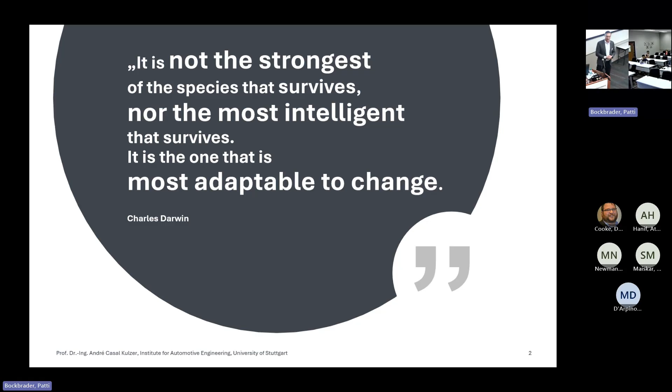There are other needs. We also have climate change, technology change. We have many changes, and we have to learn how to adapt to those. We cannot just stand still against the stream. I saw the river here in Columbus with a very strong stream - we just can't stand still.

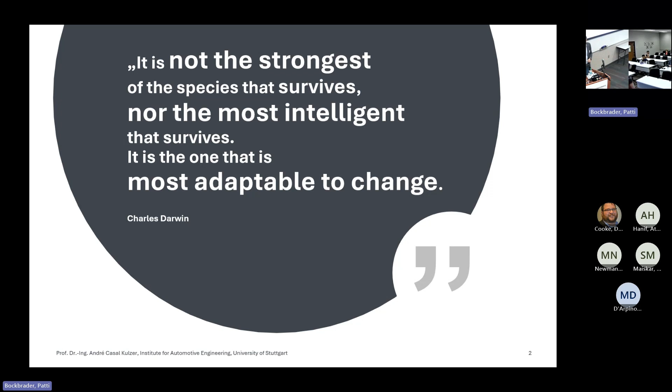So I would like to group my presentation into 3 topics. Start with energy - how is sustainable energy coming, and from where? The second chapter looks at the circular economy, and also at the boundary between a system - it's not only this system or these people, it's the complete world. So you have to look at it in a holistic way.

And then finally go to some recommendations from my side on which technologies we should cover and look for in the future. And right up front, it will not be a silver bullet, of course. It will be some diversity - again, not everything, but we need a certain variation of solutions to look at the problem.

And let me start with the motivation. As engineers, we are efficiency freaks. We should be the first ones to look at the future, and from the United Nations reports, we want to meet our needs without compromising the needs of our children and grandchildren. That's one - the quote from Darwin I already entered to start the presentation. And coming also from some business family tradition, we have also, as a management role, to maintain the ability to act and react.

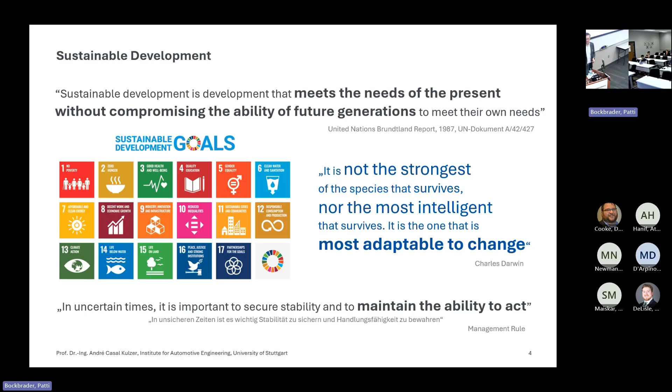If we put all our money in the casino on one number, that might go wrong. Everyone knows that, so it's always good to have a plan B and plan C. So this as a motivation starts here.

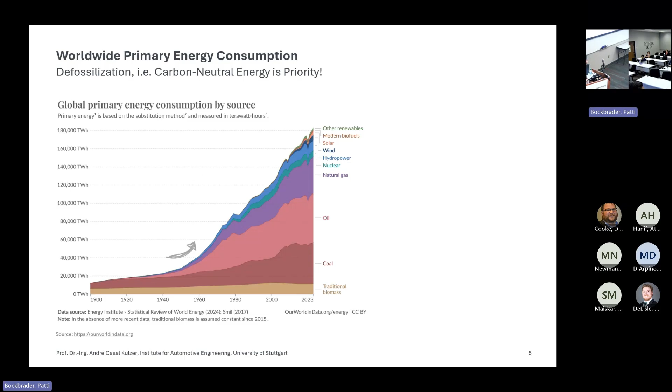One step is, of course, to go into new, more efficient technology, but that takes time. If we look at vehicles, in Europe, in Germany, they take like 10 to 12 years to be switched over. In Greece, I guess, up to 18 years. And we know many vehicles live over 30 and 40 years.

Having been at Porsche for 10 years, one of the slogans there was that 70% of all Porsches ever produced are still on the road. Porsche has existed since the 50s building cars, so there are many vehicles that are still on the road.

Maybe to go a step further, not only looking at new technology as an exchange of products, you have to look also at a complete circular economy regarding energy, raw materials, and CO2, and also where the energy comes from — not only the product being made, but the renewable energy, electricity or molecular nature, to make the propulsion of these vehicles and the propulsion solutions.

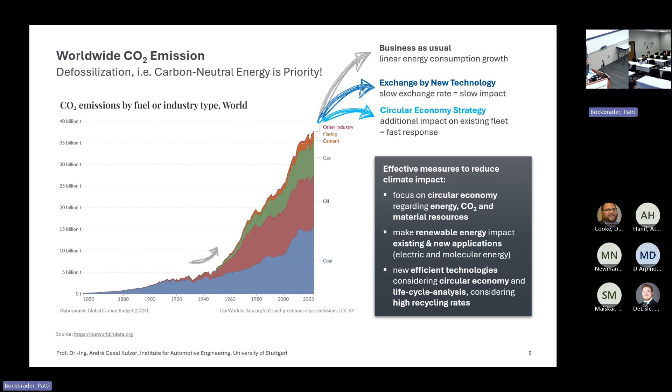So to provoke again a little bit, I saw this kind of sketch last year at the SAE Congress, and I found it quite interesting, so I adapted it to my point of view.

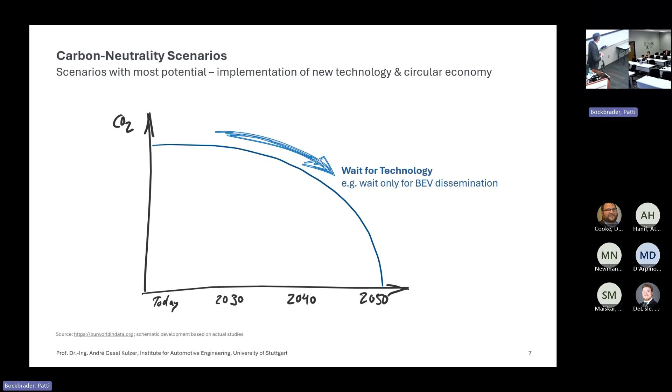If we want to just go with an exchange of new technology — let's say battery electric dissemination, which is a very efficient technology — sure, it has a wide way of improvements and good solutions for the future, especially the battery topic. The electric machine is quite well understood for automotive purposes, but the battery is still a huge topic. If we wait to exchange old vehicles for new ones, that would take more time.

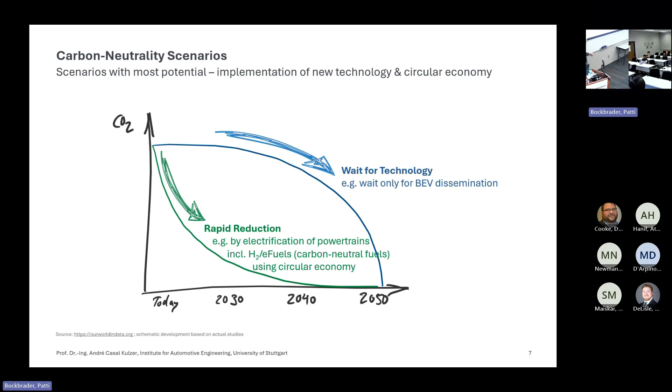If we try to be faster, one way would be to additionally integrate all circular economy topics into the energy side — not only electricity, but also molecular low-carbon fuels, carbon-neutral fuels like hydrogen or e-fuels. This could be an interesting way if we don't want to look only at silver bullets, which battery electric vehicles certainly are a very good solution, but let's also look at other technologies at the same time.

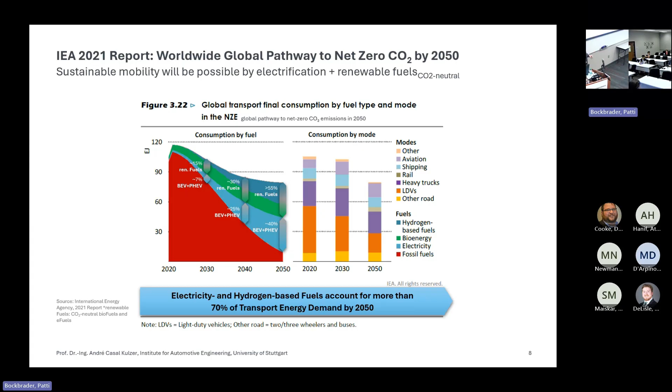Of course, for light-duty vehicles it's easier to electrify. Energy-intensive applications like marine navigation are not so easy to electrify, so you have to adapt your renewable energy carrier to your application. This also shows that diversity is needed in the future — electrification is of course one of the parts to go.

There was an update a couple of years later from the IEA. If one tries to look at it — I'll just use the pointer — they tried to separate light-duty vehicles from heavy trucks. You see that by 2030, which is less than 5 years away, that's almost no time at all. For robust development you always need decades or more for dissemination of innovation into the market, so 10 years is nothing.

But you see that even by 2030, most of it will still be oil-driven, with part biofuels, hydrogen, or electricity. By 2050 — 25 years from today — well, let's assume this IEA study is right: for applications easier to electrify, like buses or heavy trucks, there's a large capability for electrification, but also biofuel and hydrogen, and still a part of fossil-based energy needed for these technologies. So yes, electrification is important and is an important lever.

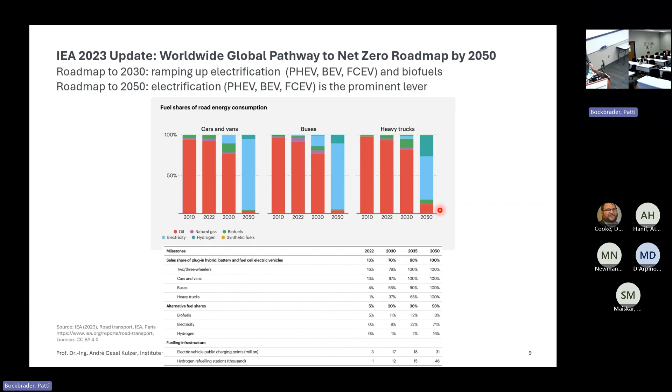Let's say neutrality, but also the energy production has to be carbon neutral. So all electricity carbon neutral today, and maybe in 25 years, large part will be, but there is a way to go. And the way to go means that we have to look at renewable energy.

And when looking at renewable energy, we actually have a lot of potential. We have wind and solar irradiation, but everything is given to us by the sun. Thermodynamics give us wind, so everything is irradiation driven. With solar and wind energy harvesting, we could have at the moment almost 1,000 times human energy consumption per year potential. So we are 3 orders of magnitude below.

We could harvest more, but the challenge is that these sources usually are far away from the industrial centers, meaning you don't have the electricity in Germany or in Columbus like you would like to have it, or the amount you would like to have it. And also intermittency is an issue.

So storage will be very important. I would say storage will be even more important the more electrification we bring into the market, especially regarding renewable energy harvesting, with wind and sun being not very stable, because you have night, for example, and at the moment we don't have so much wind. If you go then to geothermal, you might get a much better capacity factor. That's quite good, or even nuclear power is for sure a huge potential there to have less intermittency issues.

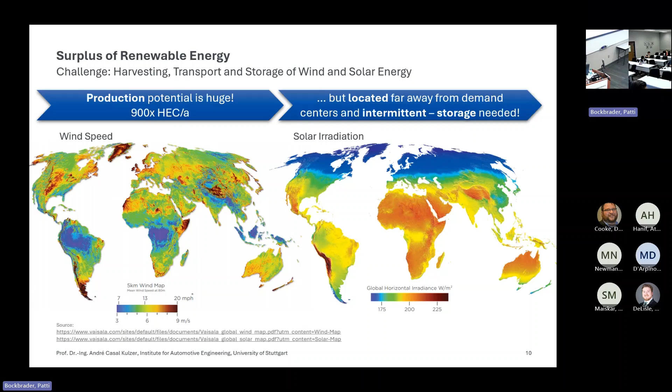But having them, storage will be very important, and storage in form of hydrogen or other synthesis-based fuel or biofuels also additionally.

So running with renewable energy, of course, you want to use that directly in your grids, but if you have a surplus of energy, you can go to electrolysis, and various applications of hydrogen are possible, from re-electrification to mobility and industry. Additionally, with synthesis, you could also have a carbon capture technology to have a CO2 neutral or low carbon energy in molecular form.

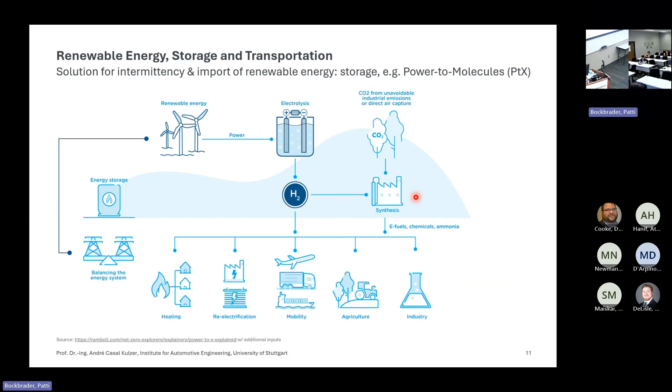So my first chapter, I like to end with this slide with the message that diversity in energy, technology, and infrastructure are just as important as biodiversity in nature, because we also know that nature and monoculture are not good, at least in the agricultural sense. If you have a monoculture, you're destroying your soil and the nature itself. And even in the Amazon forest, you have a variety of plants and animals.

This is a message for diversity. Yes, on one side, we don't want to have monoculture, but on the other side, we also won't be able to address every technology, every energy harvesting we would like to have. So we will have to meet in between and have a set of technologies, energy at our disposal to have the best synergetical way. That was the first point on energy topics.

And I would like to show you some life cycle analysis and stress out a little bit why these are important. So at the moment in Europe and the US also, it's only tailpipe-driven emissions. The EPA looks at LCA, but more to see the impact of their tailpipe emission regulation. So this is not the whole story.

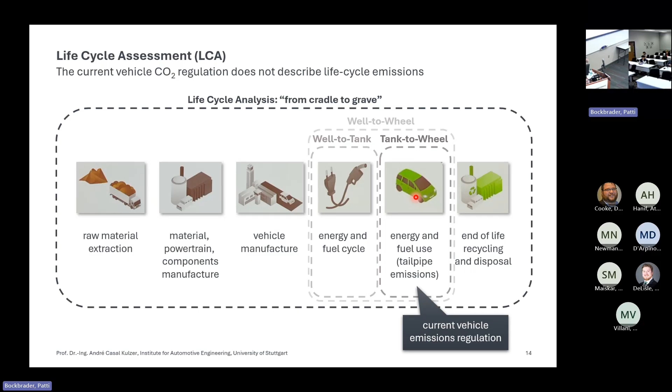But if we want to make it right, the analysis as an engineer or scientist, we have to go from cradle to grave. We include all raw material extraction and manufacturing of subsystems and vehicle manufacturing, up to recycling, and using recycled material already to reduce raw material extraction and so on. So this should be, in a simple way, the life cycle analysis you need to look for.

And I would like just very quickly show you some life cycle analysis, and I would like to start with this one, which was ordered by the German Ministry of Economic Affairs and Climate Action. One interesting thing was that, okay, they were able in politics, I hope, to understand that there is a production footprint in the life cycle, a usage footprint, fuel and energy supply, and also tailpipe emissions. And at the end, of course, the recycling part and all named here.

So the message here is comparing in a simple way the engine. You can see the carbon content of the life cycle phase here. If you look at the combustion engine, of course the user time is the worst.

The tailpipe emissions are the most relevant, but also small parts with logistics and refining, also oil and power. For electric vehicle, it concentrates more on the energy or the CO2 footprint of electricity, and we are using here the European CO2 carbon footprint mix as an average value, which also is not always pointed to charge at night and have the sun at the same time. So at that time, the new average might not be as good, but talk.

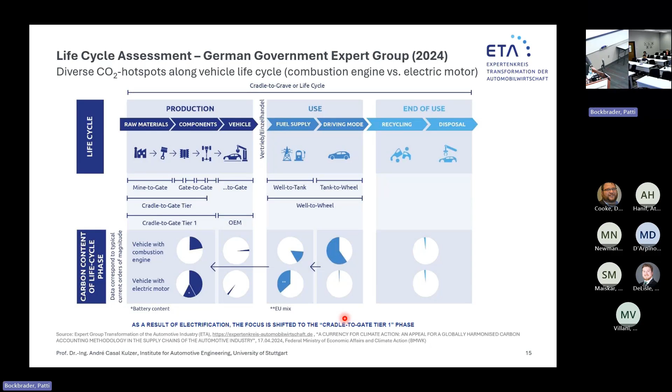And let's say the message for politics was, as a result of the electrification, focus is shifted to the production phase. So we have to look even more thoroughly at all the tier 1 and tier X phases of getting the raw material till getting the vehicle. That will be a very important CO2 part.

And there was in parallel another life cycle analysis from the German Engineers Association, the VDI, which shows this a little bit.

The y-axis is the CO2 equivalent in tons. And you see here the conventional, mild, full hybrid, plug-in hybrids. The gray ones are gasoline and diesel, which have the smallest footprints and steepest because of the tailpipe emissions, the mileage, for the 200,000 kilometers driven here.

If you take electric cars with large batteries, you have like more than double the CO2 backpack already from the start. That can be diluted depending on the quality of electricity used. Let's be optimistic and work with the average values, and then at the end they are similar to plug-in hybrids, and all these combustion engines were driven without any renewable fuel assumption. So that would be also another positive way. If we could use e-fuels for combustion engines, then we will also be better at this point.

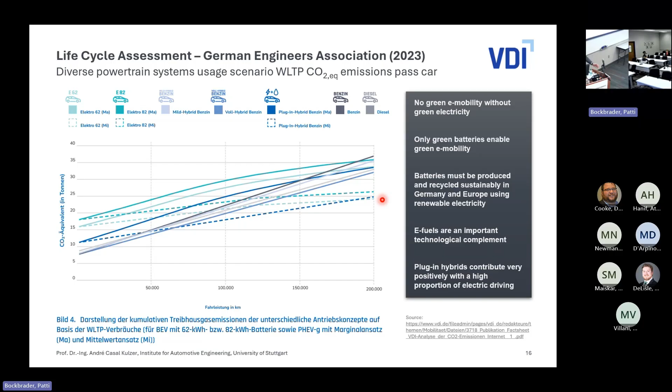And at the best point, yes, battery electric will be in the future for sure the best way to go. But till we get there, I'm not talking about 10 years. In my opinion, it's more the order of magnitude of 50, maybe something like that, till we get so much energy and infrastructure. Till then, we have to have a mixed technology which brings us faster to climate neutrality.

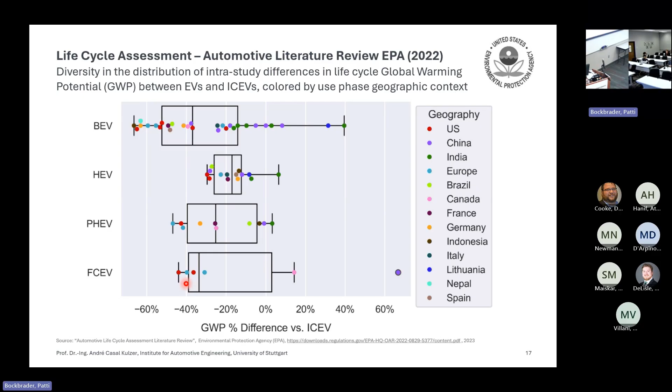But if we go down to the future technology, which I hope we as engineers understand - we have to understand past and present technology, and we have to develop future technologies - we see that these are all quite similar. And if you have availability of renewable energy, electricity, and also hydrogen-based fuels, then these vehicles are not so different in greenhouse gas emissions. So I guess it's more dependent on the energy available.

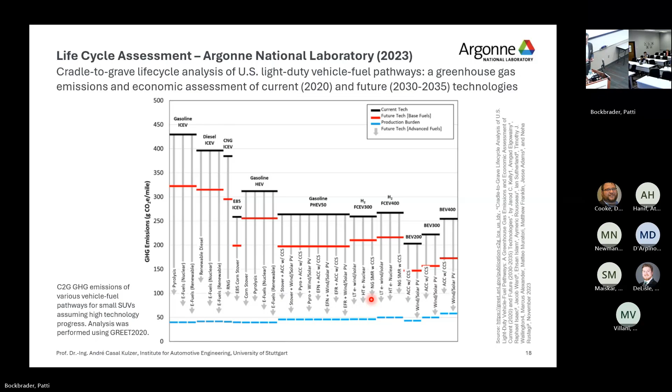Yes, at the moment in Germany we have lots of renewables. So if you have renewables in Germany, I would say just put it in the battery directly, not use it through other paths, because that would be more expensive.

And to wrap up this LCA chapter, also some FKFS and Stuttgart results from our LCA tool, which tries to gather data from Argonne, from the IFP in Paris, from Stuttgart - usually a lot of students taking part, engines, parts, electric fuel cells, combustion engines, batteries, with a common course to address these LCA databases much better

If we look at a realistic scenario today with 200,000 kilometers, you see the production footprint, cradle to gate, in dark blue, and the well-to-wheel, well-to-tank emissions for the energy. If we look at a sedan passenger car, we see that production is of course double the footprint, and using the electricity mix on average in level, comparing to fossil energy, it will always be better.

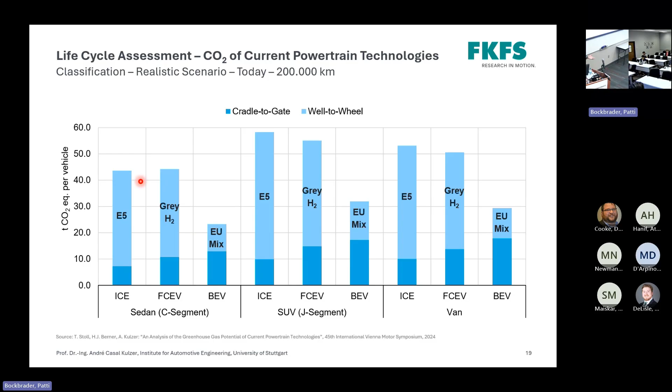But if we look to the future with today's technology from today's perspective and an ecological best-case scenario, then we will have, let's say, around 25 grams CO2 per kilowatt hour electricity, which is very good. We are about 10 times away from that at the moment.

But let's think positive. If we take e-fuels from South America, wind energy, and blue H2 with natural gas capture, at the end, depending on the vehicle, we are quite similar using these different technologies. So maybe it's good to go into electrification, but also look at hybridization and other energy carriers - ICE here is already hybrids. This allows for achieving the same result as pure electrification with an electric vehicle, and maybe having the ability of avoiding bottlenecks like raw materials, infrastructure.

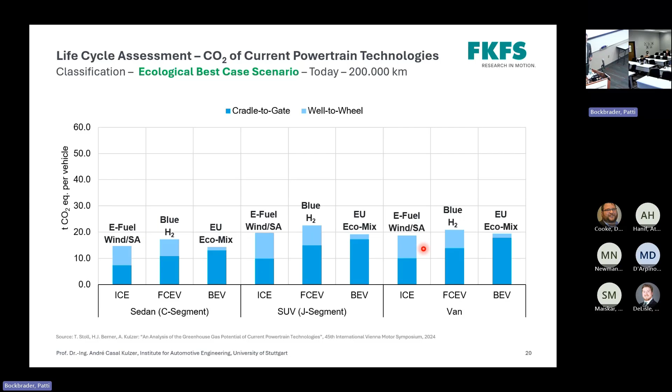That's again this last chapter. Okay, so let's start. We saw that energy and circular economy are very important, and we have to differentiate where the energy comes from, which raw materials we have, which production technology we use to assemble a car, and then we have to address also the energy we want to use.

But let me start first with the amount of the world, and let me start by being European - let's start with the European Union. We know that a quarter of the mobility in Europe accounts for greenhouse gas emissions, mainly roads, and 14% aviation and ships each, then trains and other cars. But basically, road transportation is quite relevant.

That graph I showed you, well, this is very good - and this is not directly greenhouse gas emissions, but energy consumption. If we look at the energy consumption needed for transportation, it's basically petroleum or fossil oil based, with a bit of biomass, natural gas, and so on. But electricity is very, very low, 28%. So let's make it simple: say 28% of CO2 goes into transportation, plus or minus a percent depending on.

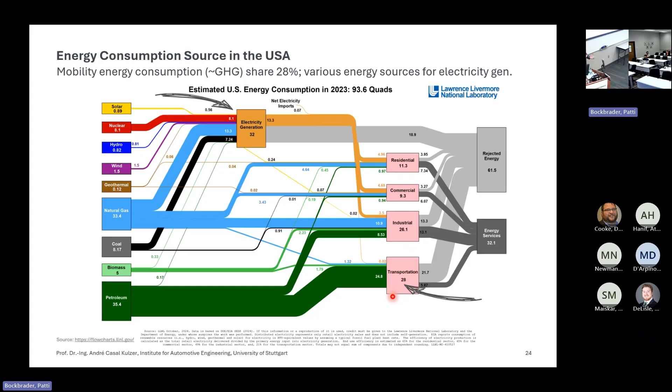Basically, also not so far away, a quarter or a third of the energy goes into mobility. So it is really important to look at that.

We know that at the moment we have 1.5 billion existing vehicles. That's an interesting number, and every year 90 to 100 million come additional into production. We had the finance crisis and pandemics, but this number is already going up again.

So we are producing more and more. Let's take some very optimistic scenarios towards electrification and carbon neutrality 2050. At this day, you can find lots of scenarios, so let's just pick a couple of them.

Say in 2030, we will have for sure maybe around 15 to 30% of battery electric and pure electric vehicles, and maybe in 2050 it will be a larger number. Between the two main scenarios from IEA, you see maybe 20 or 30 to 80% is what you can expect. So the scenarios are really so different.

Let's be optimistic and say, let's try to extrapolate with 70 to 80% of battery electric vehicles as the new registration share. But if we extrapolate that to existing vehicles, this will be a very relevant chunk of vehicles being developed and brought into the market.

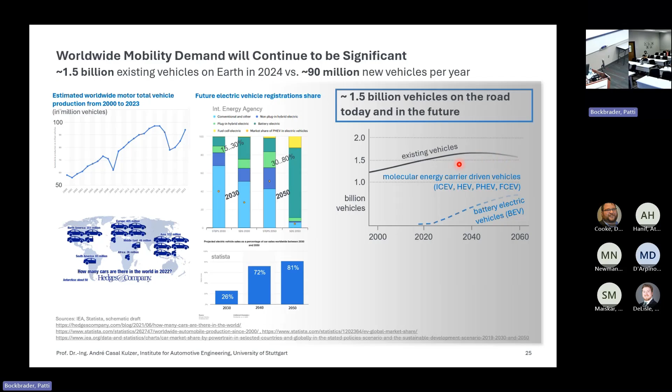This means that we will have lots of energy carriers, also molecular energy carriers, even in fuel cell electric vehicles. This is hydrogen that has to be produced in a renewable way. So we will have to look not only at electrification of all powertrains, hybridization and fuel cells, but also the energy content of the energy carrier, being electricity or molecules used for energy storage.

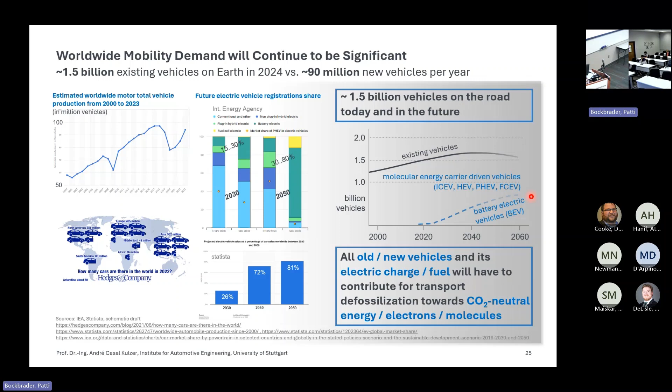This means, yes, we have to concentrate on electrification, also electrification of every combustion engine, and also fuel cells. What does that mean? This is the future. Let's look a bit at the past.

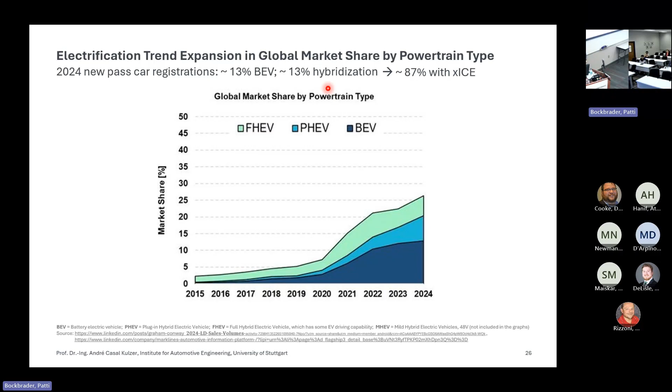So this is the car, passenger car registration share worldwide first, divided into battery electric vehicle, plug-in hybrids, and full hybrid vehicle. What we see here is that we have already an interesting share of pure electrification and hybridization or partial electrification. That means we still have almost 90% produced by ICEs, and this will reduce, yes, but we still have a large production of ICE in the next years.

What we see in China is a huge phase of electrification of combustion engines, or battery electric vehicles with a combustion engine, which are getting very popular as range extenders, series hybrids, and combinations of series hybrids. So this is quite interesting also to see.

And we see also hybrids getting stronger and stronger. When I talk to the people in China, they are quite pragmatic. They tell correctly, well, it's cheaper, and I don't need charging infrastructure because China is very large.

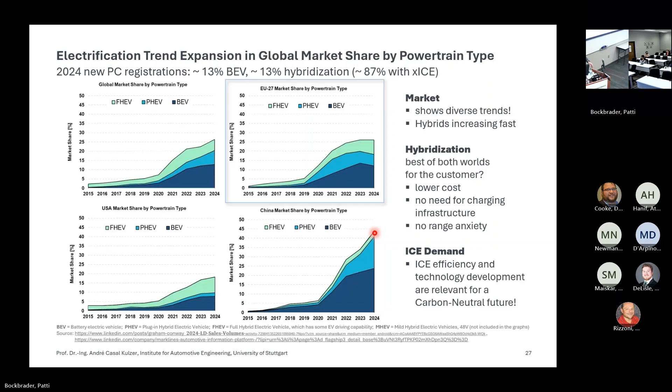It's a huge country, and to make infrastructure in this country was told to me directly as a concern by someone from the engineering department - in this large country we won't be able to make infrastructure for this. So electrification is very important because electricity is very cheap in China, but we need to assure that our customers can get to another city. So hybridization will be for sure quite interesting, and we have to focus also on ICE efficiency, also for our future fuels. This is a kind of view of the world.

Let's take a quick step also into the German numbers, and the German vehicle registration. We publish every month our registration numbers, and it's quite interesting.

All the battery electric vehicles were very popular. Subventions which went out in 2024, got cut. Now in 2025, the first quarter also already showed that this correctly built back up. So we are going towards 18-20% maybe. Let's see - actually electrification is here to stay, and it will be very important, and it will rise.

But we see also that light hybridization is quite popular in making gasoline engines more interesting for customers. And we have Mercedes doing a diesel hybrid - it is one of the most efficient cars ever, they can achieve an efficiency that is really amazing. But it's more expensive, of course, more expensive than gas. Then you see the plug-in hybrids also, because the going away of the subvention was an issue here.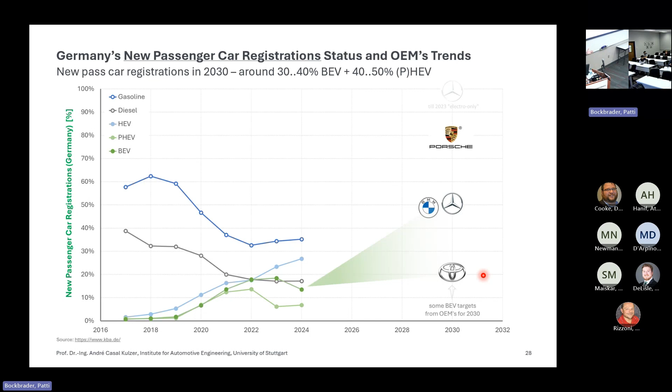Toyota knows their customers want everything: combustion, hybridization, plug-in hybrid, fuel cells, and battery electric vehicles. They're coming this year with three new models. They have all the technology, but know what customers demand, so they say between 10 and 30% - like the Japanese, they don't want to tell you something that might be wrong, so they give a range: 10 to 30% electrification by 2030. Well, let's see what happens.

Looking at in-use passenger cars, the existing passenger cars in Germany, we see electrification will go up, but at the moment it's about 5% electric or 10% electric vehicles together. This will continue to rise, and I foresee we will achieve maybe 10-20% by 2030. That means we need not only more focus on electrification, but also on renewable energy, electricity, and energy carriers.

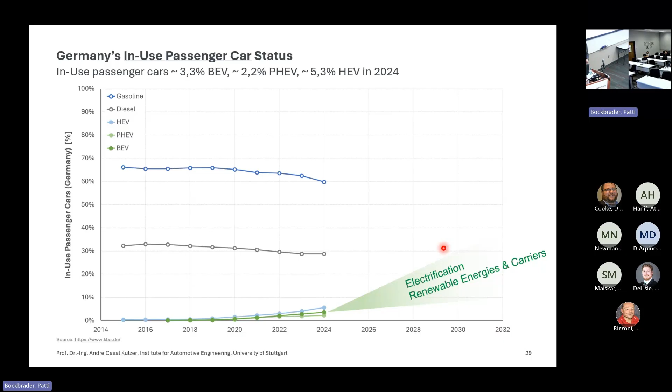So this is the perspective: we need electrification, but we all know infrastructure is very important. Because if you don't have a way to charge your electric car, what do you do? You have to search, testing your patience as a customer. That's not a good way to reach a customer. So we have to look at the infrastructure topic for mobility of the future.

Let's start by assuming we have only renewable energy infrastructure like sun and wind. Of course, if you have electricity harvested, you want to use it in the grid and distribute it directly to your mobility applications for passenger cars and others. But you don't have electricity all the time, and sometimes you have an exceeding surplus of electricity. Not using it would not be a good idea, so you have to store it. One way to store it is using hydrogen electrolysis and hydrogen cavern storage, or others.

This means having a way of re-electrifying hydrogen to electricity so you have energy at your disposal day and night. If in the future you have such a surplus of energy, you could use that hydrogen for synthesis using CO2 from point sources or direct air capture, producing methane, methanol, or gasoline. You could use the hydrogen directly, but also use synthesis with methanol or fuel into your car - being an e-fuel synthetic.

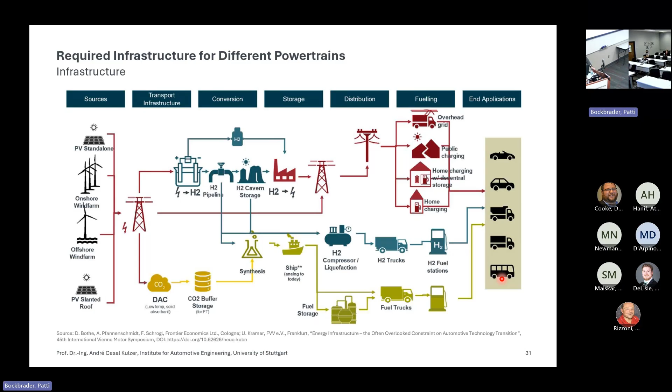These are various possibilities of infrastructure required for neutral mobility. To show you the European perspective: the Europeans said, by 2030 we would like to have everything electrified. That would mean for all kinds of vehicles, from small to long-haul, we would need in Europe almost 90,000 kilometers of new grid infrastructure. What we have and what's available, considering technical bottlenecks - availability of manpower, technology, everything needed to set up a plant or lay cables to distribute the electricity - that's already 80% less than what we need.

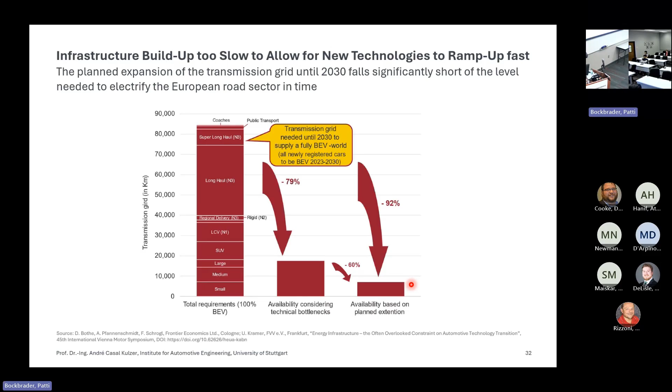And what we actually have planned is even less. So what politics wants is pure electrification by 2030 - that is, by a factor of 10, not possible. So we have to look at additional topics, because this is apparently how they started things - very turned around.

Having been at Porsche, it's nice to have the engine in the back in the 911, yes. But if you do electrification of your cars, you need better electricity - you have to bring up the infrastructure at the same time. Just putting the carriage in front of the horse is not the solution, because now we have great products, great electric vehicles, but many customers don't know how to charge them.

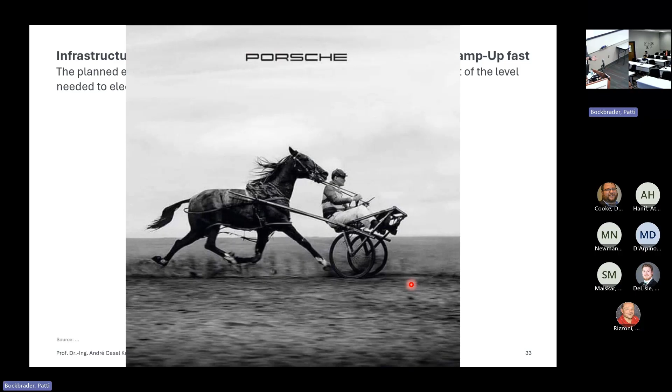That's the main issue, and this slide is the summary of the small chapter. This was a study done in Germany with energy providers, OEMs, and tier one suppliers.

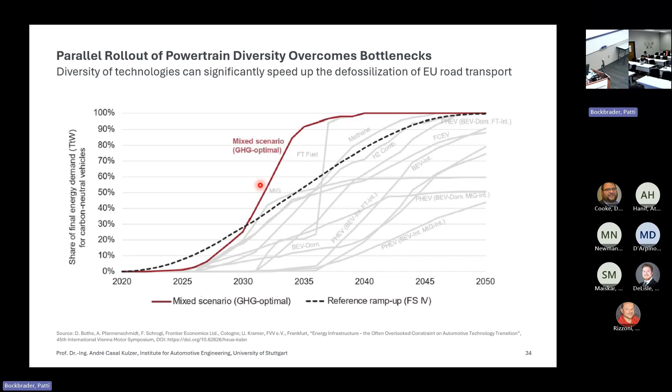What they did with this model was also to see which bottlenecks exist. Where do I get the raw material? Where can I get the infrastructure built up, the manpower, and other technology bottlenecks? The result of this study was that we need a parallel rollout of all powertrains. This was the mixed scenario: if we want to really tackle climate change quickly, then you cannot just focus on battery electric vehicles. You have to focus on other technologies to avoid bottlenecks that come with the scenario, from raw materials to infrastructure up to building the products.

So we need diversity, but let me start with the point of electrification and some very important potentials that come with it. Some facts on the right, you see a Ragone diagram, specific power in kilowatts per kilogram, or specific energy in megajoules per kilogram. You see in the first part that molecular storage carriers are much more specific dense than battery technologies.

In the future we will continue to have, and we need, battery research to get better and better batteries. It's for sure we have to do that. The next 10, 20 years will be very, very interesting at this point. But we also have to recognize, on the other side, electric is one of the best engines you can build. It has the best torque and power specific density you can have in comparison to a combustion engine. It's a really great subject there.

But efficiency and power are not the only parameters when you, as a company, are going to decide on a product. You also have to look at cost and so on. The battery electric vehicle is three times more efficient than, let's say, an efficient hybrid configuration. When run on fuels having higher potential, the difference to the battery electric vehicle might not be so large. So that diagram shows the efficiency, fuel efficiency on one side.

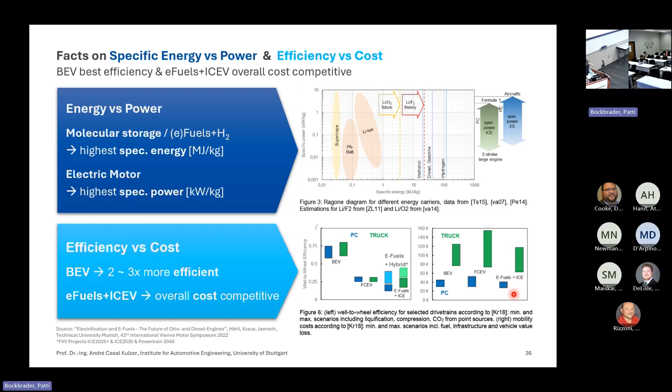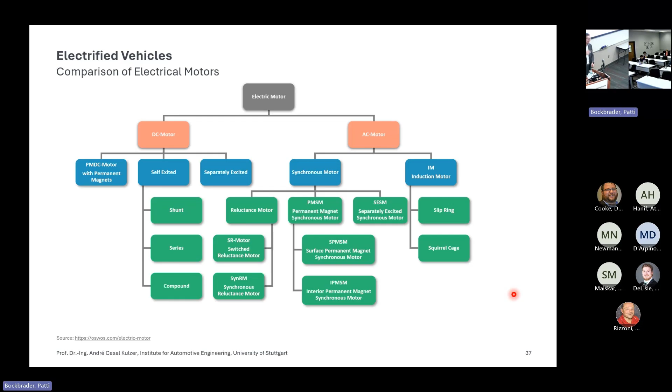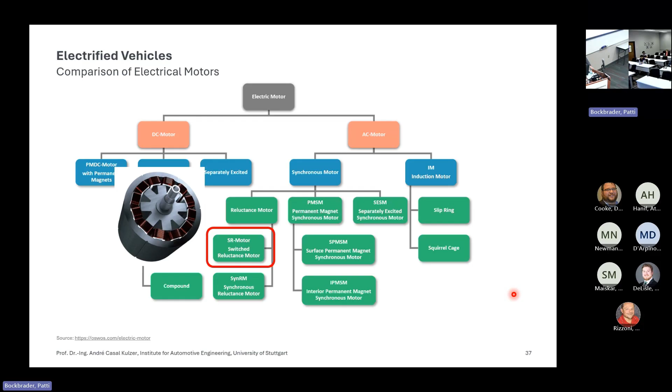Regarding electric motors, I'll go very quickly because I guess there's a much better lecture on electric motors than I can give. But basically, some of the most interesting machines are for sure permanent magnet ones, which we use to reduce rare earth usage. On the other side, we also highlighted switched reluctance engines that are interesting because you spare the magnets needed for that. You can also go with induction motors to avoid the magnets, or synchronous reluctance engines. We just need more development there.

And maybe just focus on some different developments for sure. Electric motor developments in the last 10 years for automotive purposes have included a lot of progress in hairpin windings and also direct cooling, stator cooling, rotor cooling from the inside. So there have been many interesting developments.

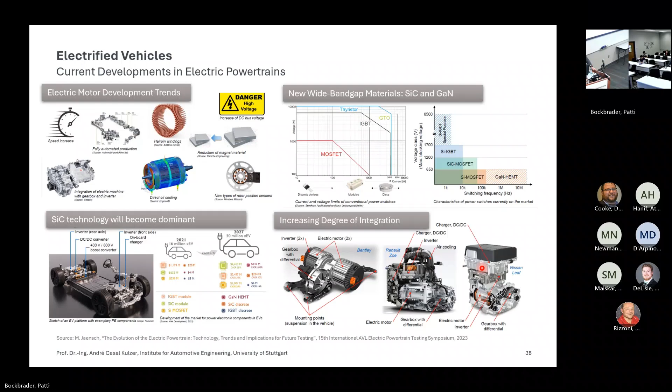On the other side, there's also potential with silicon carbide and so on, which is quite interesting, giving less losses for electronics. Very important for vehicle integration is putting the electric motor together with the cooling, the gearbox, and power electronics, everything integrated in such a way that the vehicle packaging is very attractive - a motivation to buy.

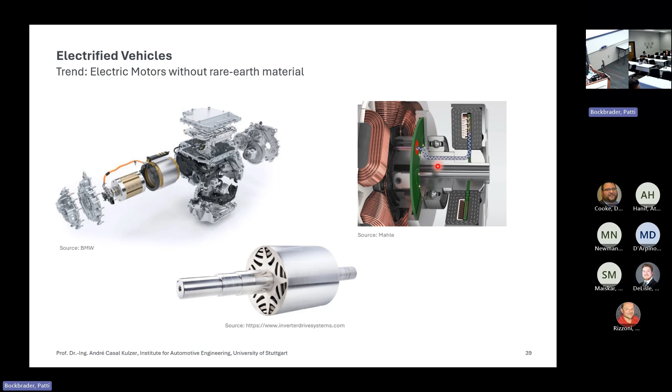As already mentioned, there are many possibilities of reducing rare earth usage with reduction sheets. BMW already had a solution, or now has a wireless induction system. There are other interesting developments on this side that would, of course, also be a trend in the coming years. At the moment, many electric motor applications are coming with these developments.

And one last slide, maybe axial flux.

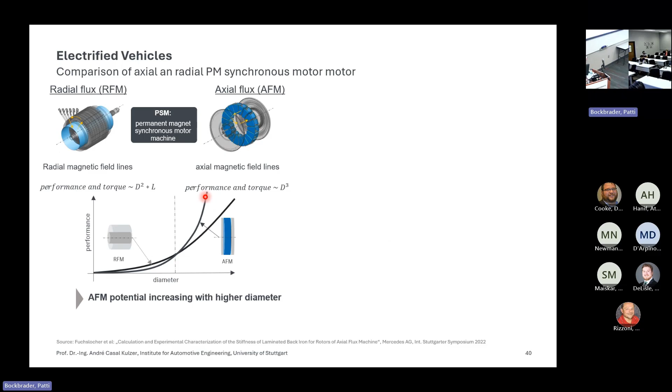Axial flux machines definitely. Let's try to motivate the axial flux machine concept from a manufacturing point of view: the stator is in the middle and the rotor is only on the sides. The interesting thing is that performance and torque on the radial flux machine rises with diameter squared times length, where for diameter cubed, the axial flux machine... for a certain diameter, the axial flux machine will be much more performant and much more interesting from a packaging and weight point of view. For the same 250 kilowatts, the axial flux machine is almost a third of the weight, and much less packaging volume, which makes the integration into the architecture much easier.

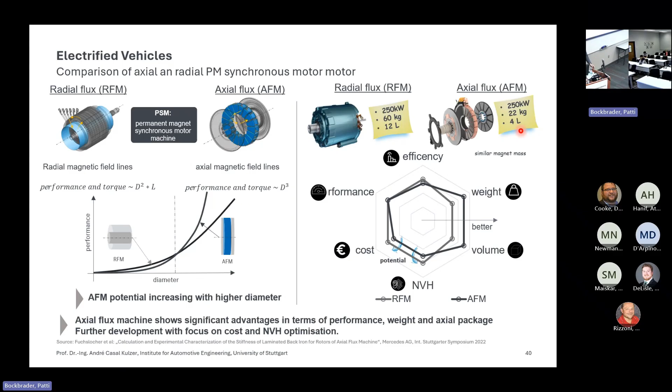So just to give an overview, electrification is very, very important and very interesting. It has lots of new topics from batteries, electric machines, and power electronics. There are many topics to work on.

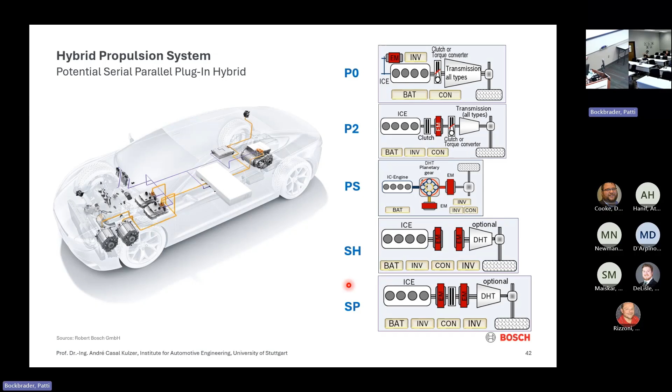Additionally, electrification in hybrid setups is also very interesting. This is an old slide that focused on this. At that time, P0 was the start of the technology, the P2 configuration was the actual parallel hybrid, or the split hybrids, like the series hybrids, which are very popular in the Asian world, or series-parallel hybrids, which are also interesting. The Chinese also look very strongly at P1 and P3 hybridizations, which are very interesting for more city-like applications. In Germany, one was also always looking at the autobahn, the high speeds. So those were not as interesting then, but they will for sure be interesting.

One project I would like to show, my last project, was Porsche doing the 9A3 combustion engine under one concept with motorsport hybridization in P1, not only fast but structurally integrated, with an additional electric turbo, an electric machine compressor and turbine, so that at high power it's producing electricity directly - essentially heat recuperation into electrons. We eliminated the wastegate and any other heat loss from charging; instead we brake the turbocharger to produce electricity while still achieving the right boost pressure, and at the same time producing electricity for the motor.

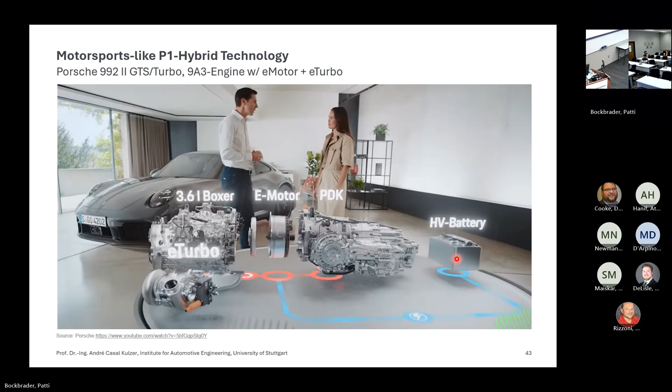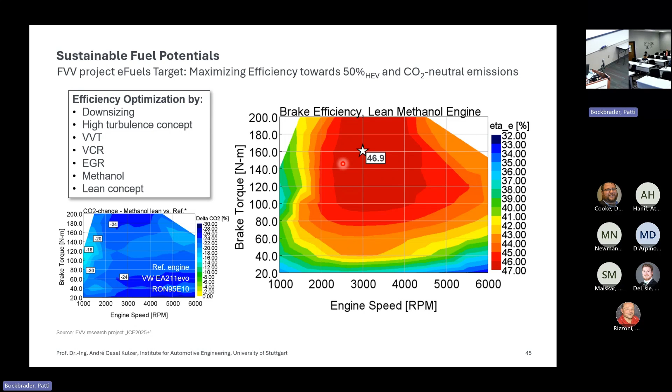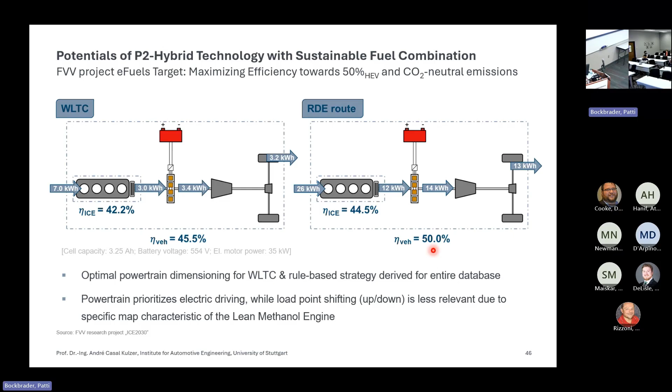Looking at additional potential for hybridization, we had an FVV project, the methanol high efficiency engine, using extra technologies like downsizing, tumble concept, variable valve timing, variable compression, EGR, and running a methanol lean concept with very high mean efficiency. Putting this engine into a P2 hybrid configuration, on the WLTC or real driving fuel consumption, we were able to achieve around 50% thermal efficiency, because the methanol lean engine was always running in a very good efficiency zone, or otherwise, during phases when the combustion engine wasn't needed efficiency-wise, it stopped, and we could, with energy recuperation, compensate and achieve very high overall efficiency with this kind of application.

But talking about IC engines - I took this from some slides, and from you as well - we have for sure done lots of technology development in the past, and there is still lots of technology to be addressed when talking about internal combustion engines.

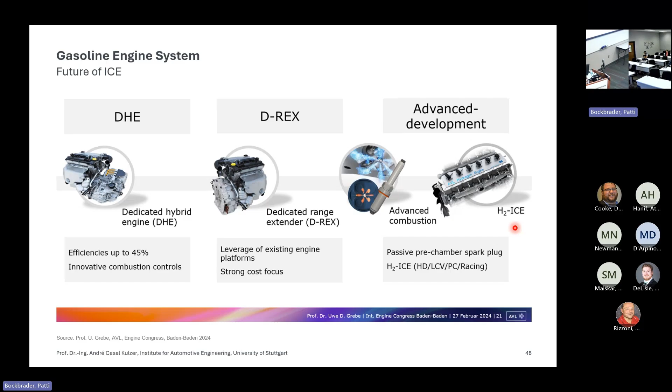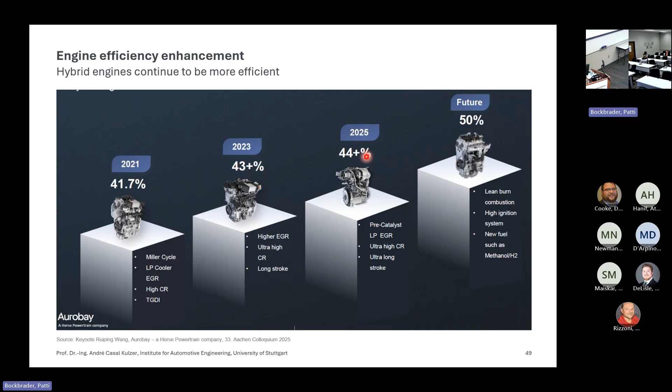For sure, making IC engines dedicated for hybrid applications and operation strategy, or going further to maximize efficiency with advanced combustion, pre-chamber or jet-type combustion concepts, or going into hydrogen or methanol technologies, like for example oxy-fuel or UV-based technologies - they try to take everything into account, and some of these technologies I already talked about in the presentation. They want to go into ultra-high compression ratio, ultra-long stroke internal combustion engines, addressing emissions topics and fuels like methanol and hydrogen, and they are trying to achieve more than 44% thermal efficiency.

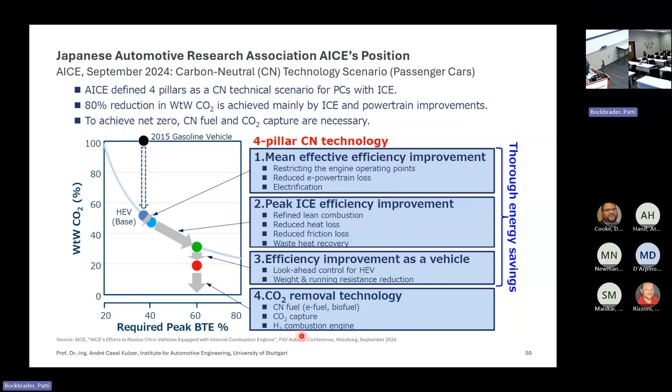If you look at Japan, and companies like AICE and FVV in Germany, they also like to address these kinds of technologies - firstly looking at electrification, meaning hybridization as a base, then peak efficiency improvement with lean combustion, heat loss and friction loss reduction, waste heat recovery, and hybridization operation strategies to improve fuel efficiency further. At the end, they address the rest of CO2 with carbon neutral fuel, treating it all equally together, with CO2 capture to create a circular economy.

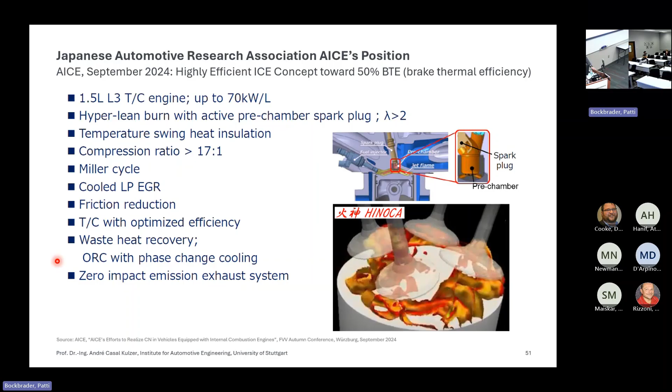So maybe to wrap up the talk, I'm already reaching one hour slowly. Finishing with the synthetic fuel plant - being at Porsche, I worked on the electric side, but also very thoroughly on the e-fuels side.

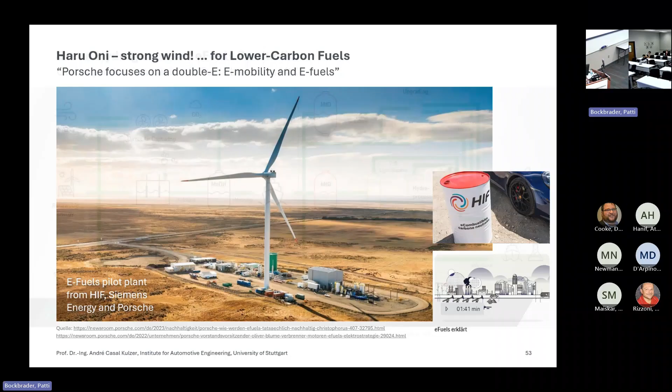We put a pilot plant there to show that it is possible to do it. At the moment there is one windmill, but in the next 5 years there could be like 500 at the end.

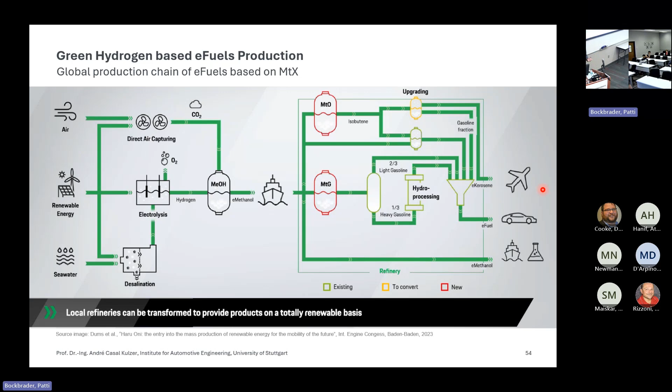Basically the electrolysis with renewable energy, air capturing, methanol synthesis, and then methanol to gasoline, all to get kerosene and methanol for various applications. You always get a stream of hydrocarbons, so you cannot just do aviation fuel, or just marine fuel, or just passenger cars - it's not possible. You always have green carbon. If you want to really have sustainable aviation fuel, you also have to have e-fuels for passenger cars and use them.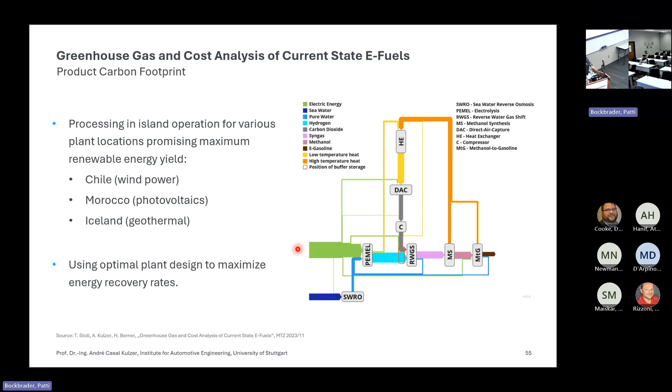What we found out is, yes, if you look at wind power, you have the possibility to reduce automobile emissions from fossil fuel down to 80%, just with today's technology. At Porsche, we saw that it could be more.

In Iceland the geothermal is amazing, yes. But the insecurity here comes because the holes drilled for geothermal could hit natural gas pockets, and that natural gas impact is something we will consider all the time. That's why these are high.

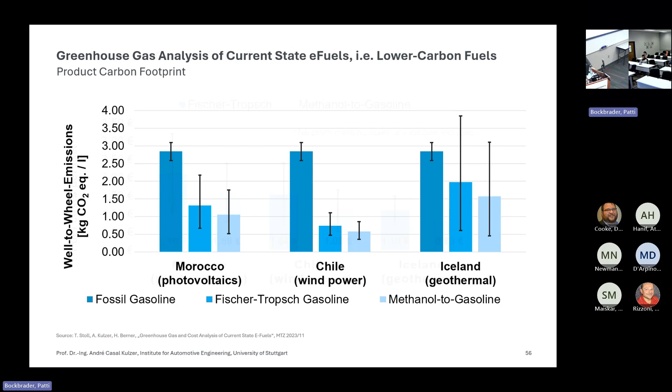We try to look at life cycle costing for this fuel, and we don't look at profit margins, taxes, or subsidies and so on. You could get around 1 to 1.5 euros per liter equivalent. That is, I would say, competitive. And these are prices we've seen standing for 5, 10, or 15 years.

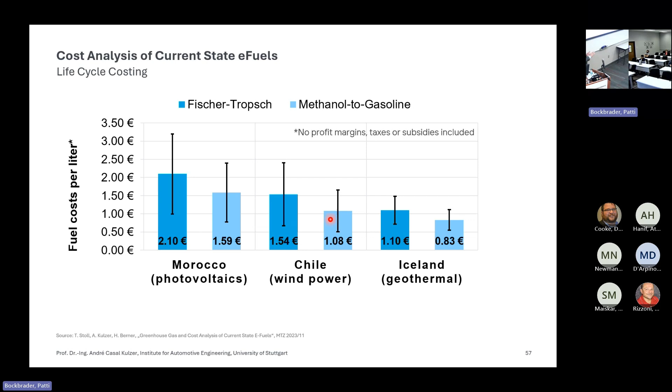It will be quite interesting to bring into the markets. If fossil fuel with CO2 taxes rises, then it will be even more so. The cost derives mainly from the renewable energy plants - using wind power, the windmill is half the cost of the fuel. If you go into photovoltaics, it's more expensive, and that's the cost share you have.

So if you want to do hydrogen-based fuel, you have to go where your renewable energy costs are very low. That's why we didn't make it in Germany - it's like 5 cents per kilowatt hour for the access cost of a plant. If you go to Chile, you have 1 or 1.5 cents per kilowatt hour, which makes it very effective.

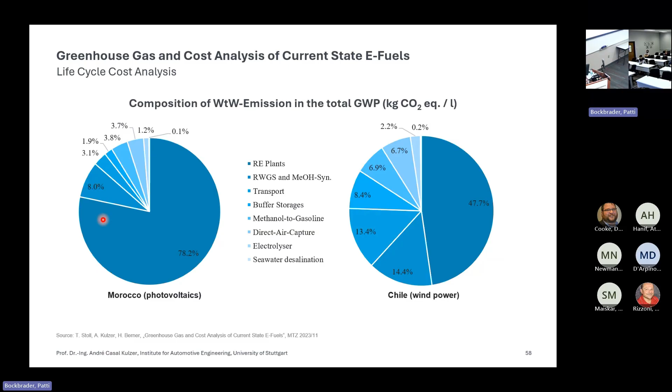Okay, so I'm coming slowly to the end. I wanted to just show some results. When we were in the formulation development, we saw that both from the production side and from the side of engine operation, we have different demands. The production side wants to produce it simple and cheap, and the combustion engineer wants to have an amazing motorsports fuel. These are not very near goals to achieve these criteria.

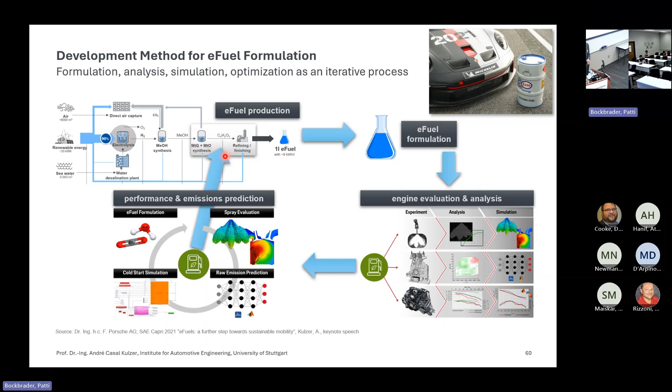So we had to have some iterations to come from production evaluation. We did some machine learning on topics from emissions and cost to performance, to see which hydrocarbons are best for combustion and how we can choose production for that. We had some results, and I'll just focus on one.

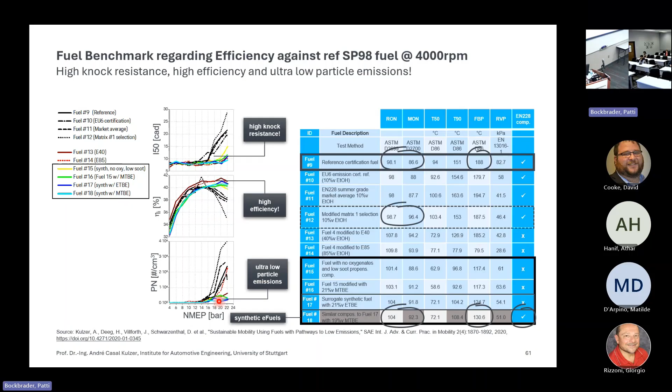The black curves are the reference fuels, all going into knock, going into later combustion crank angles, which reduces efficiency, of course. The light blue and yellow ones, the non-compatible fuel, show very high efficiency and very low particle emissions. So this was quite simple.

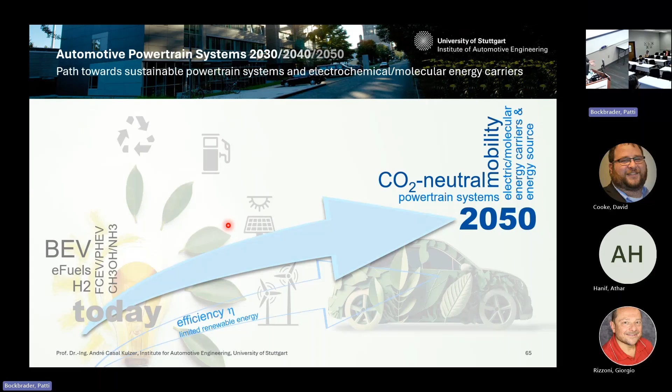One possible vision is that today we focus a lot on electrification, and that is very important, so we should not forget it because we will need it all. It's understandable, given the currently very expensive renewable energy, that it's difficult to think else than using that electricity directly in the battery. I fully understand that, but we will have to focus in a broader way on electrification.

By 2030, electrification and hybridization of transportation, but also in the form of hydrogen and hydrogen-based vehicles. Looking at the many renewable energy plants being set up, I'm pretty sure we will have a surplus of energy, and we will have to store it in some way, and it won't be all batteries. We will have hydrogen-based storage needs.

Maybe then also in terms of e-fuel and methanol. I'm pretty sure methanol will be the new oil of the future in, let's say, 20 to 30 years, if we are able to displace fossil fuels, as the next energy carrier that comes nearest and is known by itself, methanol as a start for every energy carrier.

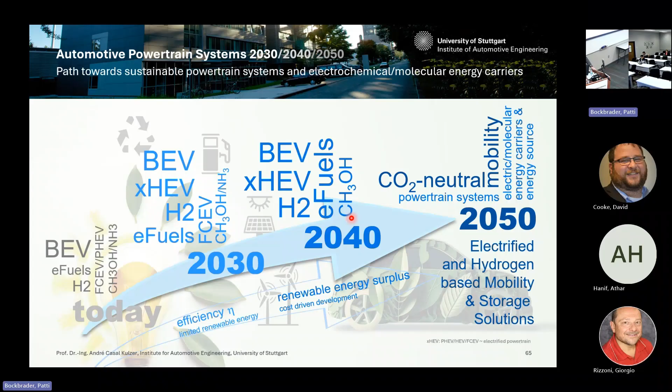So I believe in an electrified and hydrogen-based mobility and storage future, with these three main classes of powertrains and energy carriers. Fully battery electric vehicles or light-duty vehicles are definitely very important, but we also have to address renewable fuels, electricity, and hybridization - maybe not only e-fuels, but also using hydrogen in combustion engines for energy-intensive applications, especially heavy duty.

And with that, I would like to close with some takeaways. I would say the future will be an electrified mix of technologies, and we have to look not only at the powertrain, but also the energy source and the energy carrier, and at the infrastructure build-up.